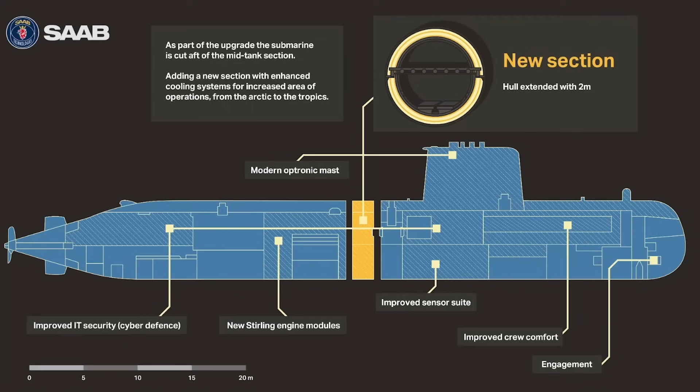There have been instances where old subs were cut in half and lengthened by inserting additional sections. In this case, however, the sub has been designed from the start with additional hull sections.

The sub is generally of the same width as previous conventional subs, but it appears to have X-shaped tail surfaces instead of crucifix ones. Two towed array sonar booms may also be installed at the back. Otherwise, general design and layout is similar to previous conventional submarines, so one might surmise that the design stems from similar conventional sub requirements, shipyard limitations, and so on.

Has the Wuchang shipyard ever built subs with nuclear reactors so far? No, but so what? There's always a first, of course. That same company used to operate at a downtown Wuhan facility for decades, but as of late 2010s, submarines were built in a new facility in Wuhan suburbs. Who's to say that one of the added capabilities of the new complex is not work with nuclear reactors?

Unnamed US officials from the articles also said they don't know if the nuclear sub contained nuclear fuel or not, which is to say, it's theoretically possible that a ready-made reactor was installed in the submarine, but nuclear fuel itself was not in the reactor, perhaps to be inserted at a completely different facility, perhaps one having more experience with that.

Large attack subs have big reactors with lots of fuel to last them for decades. But if speed requirements are modest, if the sub is smaller, then a small reactor might suffice, and even less fuel might be needed if the reactor is made to be refueled more often through a special hatch. Refueling big nuke subs required cutting the hull, precisely because it was almost never needed. Now, we don't know if indeed that Chinese sub is meant to be refueled often, but we do know that it's around half the displacement of a typical nuclear attack sub.

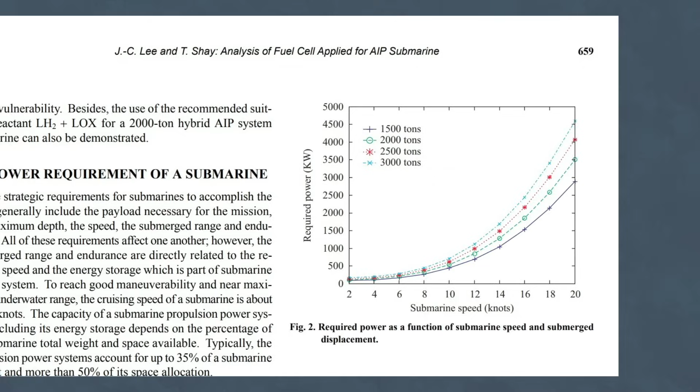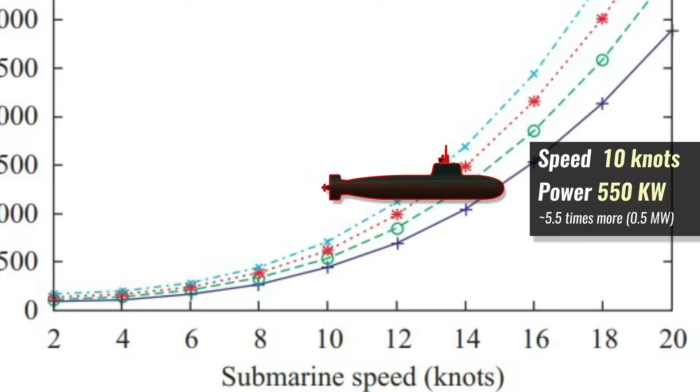The power requirement doesn't rise linearly with speed. This paper on air-independent propulsion for submarines suggests that a 3,000-ton sub going at 5 knots is using approximately 100 kilowatts. At 10 knots, it uses some 550 kilowatts. Our figures adjust for the constant power load to run life support and electronics, which is usually 100 to 200 kilowatts at all times. But at high speeds, extra power load really shows. At 20 knots, it is now at 4,500 kilowatts, or over 40 times more for propulsion, even though the speed was increased by 4 times.

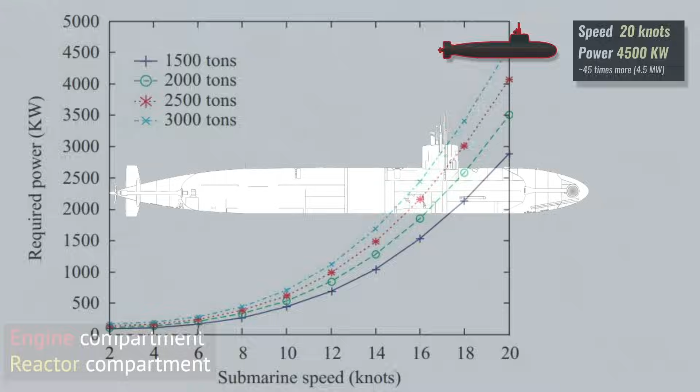That's why nuke attack subs have huge propulsion sections. The stuff about small reactors is not purely hypothetical. There has been research undertaken about possible benefits of small nuke reactors for such small power loads on submarines.

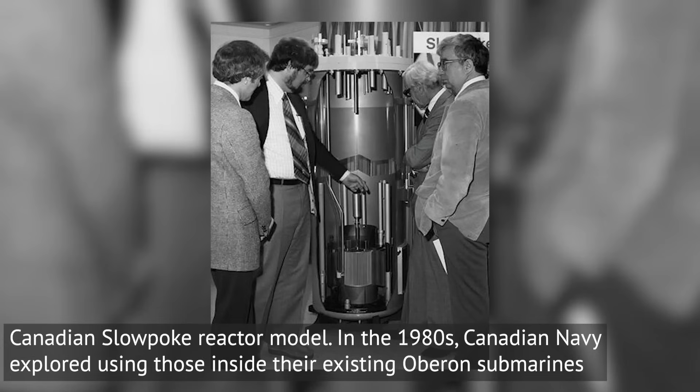For decades, such research would appear in the West, but nothing came of that. By the end of the Cold War, the US got rid of their small conventional subs altogether, and most other users did not have the money or the need to pursue such small reactors, especially after the end of the Cold War. The Soviets did experiment with one such sub. In the mid-1980s, they put a somewhat compact reactor by their standards inside an old conventional submarine. But as the Soviet Union fell apart, such experiments were not repeated.

Today, the Chinese Navy is all that the Soviet Navy was, and then some. It has more money, more resources, and access to better technology. It's no wonder it would be trying out such new technologies.

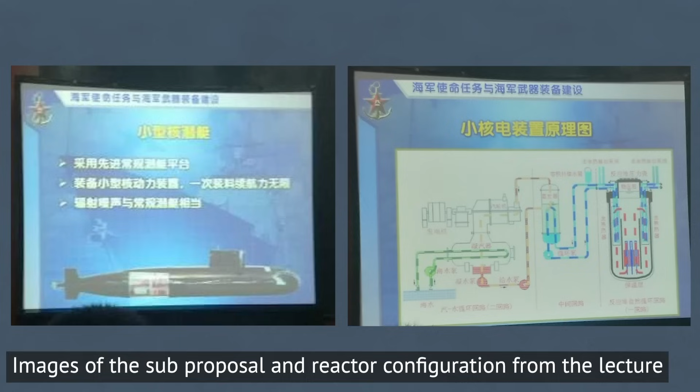In 2017, a retired PLA Navy admiral held a lecture at China's Northwestern Polytechnical University and, among other details, said that China may be working on low-power auxiliary nuclear power plants that can be fitted on conventional submarine designs. There have been occasional rumors on construction of such submarines since. One set of rumors said components for the first batch of 4 low-power nuke subs are to arrive at the end of 2024. That sort of makes it initially unlikely that the photographed sub was nuclear, unless it was an experimental vessel to test out the concept before the first batch was assembled, which does make sense.

What does all that mean operationally for China and the US? China would get a new class of submarines which would share some traits with both conventional subs and nuclear subs. The new subs would get basically unlimited underwater endurance, limited only by food supplies, maintenance needs, and so on.

Larger nuke attack subs can even do 6-month deployments. These new smaller nuke subs would likely deploy for shorter stints, but even at 2 or 3 months, it would still be a big change from today's endurance of conventional subs, as those months could be spent completely underwater. Not like today, where an AIP submarine can spend maybe 2 or 3 weeks underwater in total before having to go back someplace to restock on fuel for its AIP system.

Speed-wise, the new sub would be similar to conventional subs and not nuke attack subs. Everything from the reactor to the air-independent Stirling engine would be sized up to a constant, fairly low power output. It might be 5 to 6 knots like in a regular conventional sub, or even 10 knots. That's impossible to say right now.

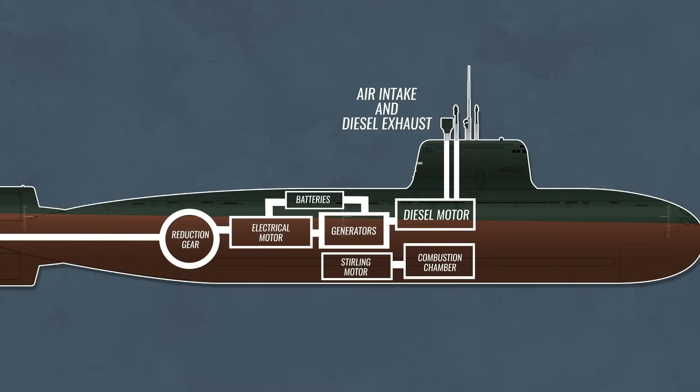But how would the propulsion work on such small nuke reactor subs, and how does it compare to other Chinese subs? Today, China's conventional subs have a diesel engine, which is turned off during dives as it needs fresh air. They also have an air-independent Stirling engine. Its working fluid is then heated by an outside source, like by oxygen and diesel fuel burned in a pressurized combustion chamber.

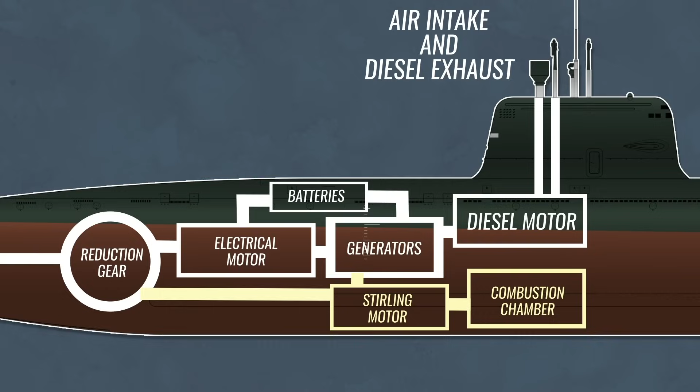Produced heat drives the Stirling engine, which then drives the propeller shaft and a generator, which fills up batteries as needed, for when more power is suddenly needed. The Stirling engine itself is best when kept at continuous power levels. Cruise speed of air-independent propulsion subs are usually estimated at 4 to 6 knots.

Typical nuclear attack sub has its nuclear reactor providing steam to the steam turbine, which then turns the propeller and powers the electrical generator. Steam turbines can quickly ramp up power for speed dashes. Nuke attack subs can often rely on dashes in their missions, but conventional subs are largely about ambushes, so a constant power from a Stirling engine may be enough, and what little extra power burst may be needed at times could come from stored electricity in batteries. That's basically how conventional AIP subs work today as well, using AIP for cruise and batteries for short power bursts.

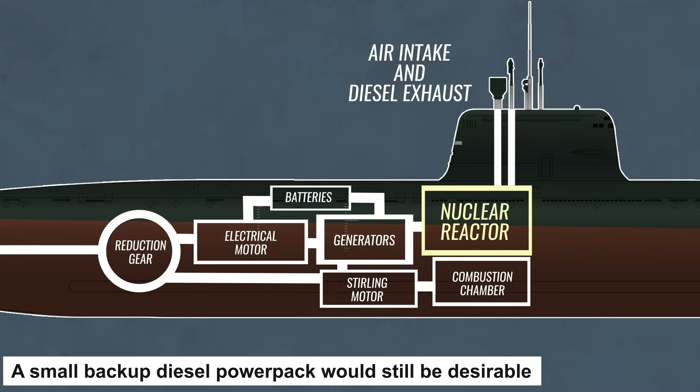This new low-power nuke could go a few ways design-wise, but the setup rumored some years ago does make sense. Instead of the diesel engine, a small nuclear reactor is inserted. It provides steam, and that steam heats the process in the Stirling engine, so a separate combustion chamber, oxygen and diesel tanks are not needed.

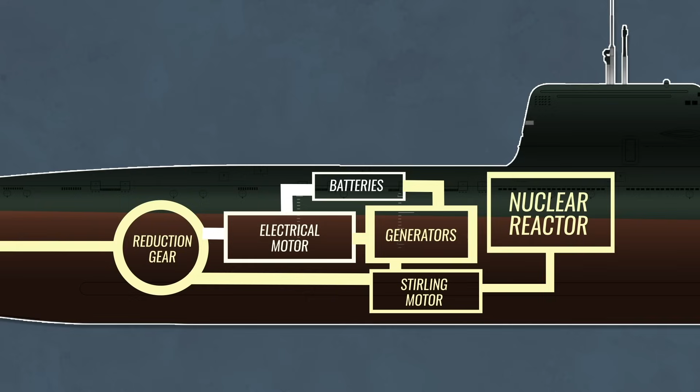There is no exhaust. The Stirling engine can then either turn the propeller more directly, or it can power an electrical generator. The latter is more likely for a modern submarine, as such a layout is what new submarines seem to be going for. US Columbia-class nuclear sub will use an electric drive.

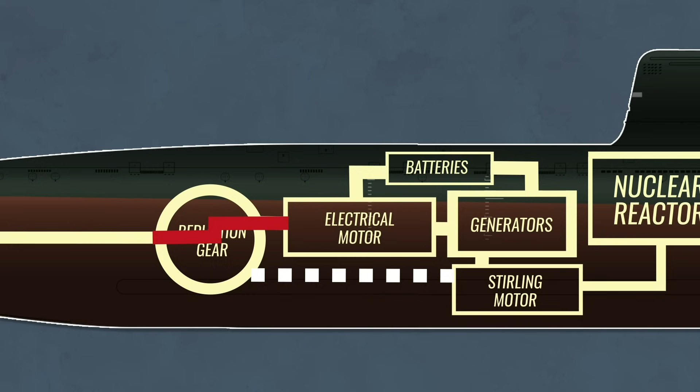Also, a Stirling engine might produce a bit less noise than a comparable steam turbine. It's a closed-cycle process, steam pressure is lower, and there are fewer moving parts in it. Low noise is one of the most important features for a submarine. Pure battery-operated subs are quietest, but even with modern lithium-ion batteries, we are probably talking about 10 or so days of endurance for a modern sub like the Japanese Taigei class.

Old lead-acid batteries are roughly 3 to 4 times less power efficient than the proven lithium-ion models. Hydrogen fuel cell-based AIP is the second most quiet solution, and Germany uses it a lot for its smaller coastal submarines. Stirling has moving parts, so it makes a bit more noise than fuel cells, but it's a decent choice for larger submarines.

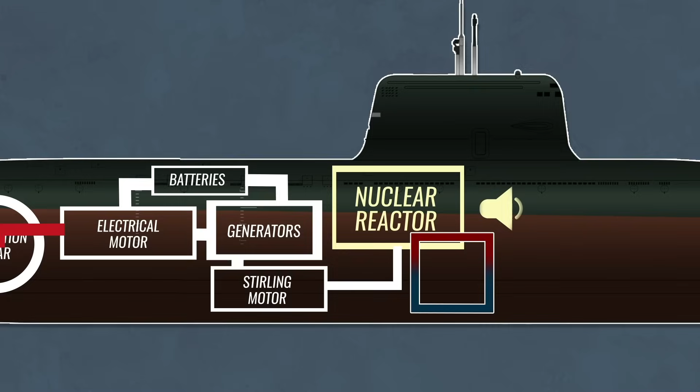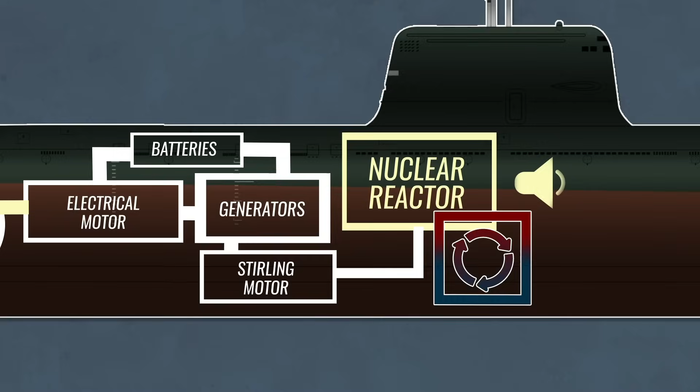Now, a nuclear reactor in itself is quiet. Today's submarine reactors don't even have to use coolant pumps, but rely on natural circulation, except for high-power speed dashes. A low-power reactor in this new Chinese sub would need no pumps. The rest of the machinery is fairly quiet, certainly not louder than the current Chinese Stirling engine subs, and if pure electrical drive is used, which doesn't need a gearbox, then the overall noise levels can drop even a bit more compared to today's Chinese subs.

Nuclear reactors have the additional benefit of having enough power to extract oxygen from the water through electrolysis. Conventional subs might find said process too power demanding in the long run, either cutting into their battery capacity or simply limiting their dive time.

How might the Chinese fleet look with those new subs in the near future? Today, China operates little over 45 conventional submarines. Over half of that number are older types that don't have air-independent propulsion. Those might be the first to be replaced with the new small nuke reactor subs.

China was building anywhere from 2 to 4 conventional subs per year, not counting production lulls when it would be switching to a newer model. It seems less likely that the higher-end figure would be achieved in the near future, given the cost, but 2 or so per year would be perfectly doable for a shipyard like the one near Wuhan.

Nuclear reactors are costly, but again the overall sub is smaller and less capable than a big nuke attack sub, so its plausible cost would be somewhere in between the nuke attack and a conventional sub, adjusted for Chinese salaries, of course. Plus the smaller sub would have a smaller crew, resulting in smaller annual costs.